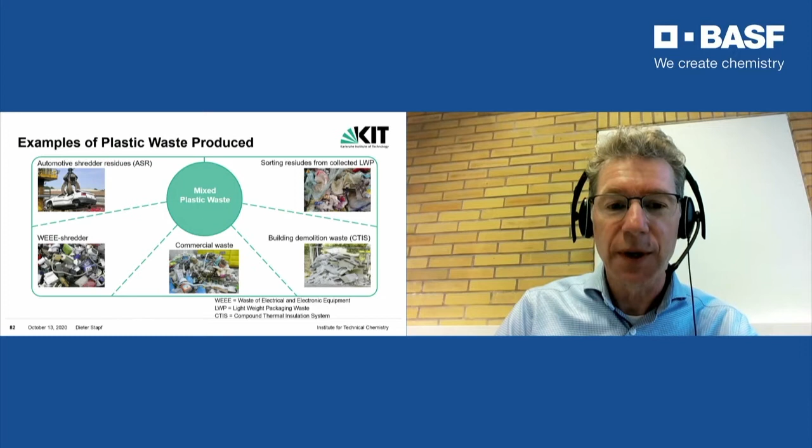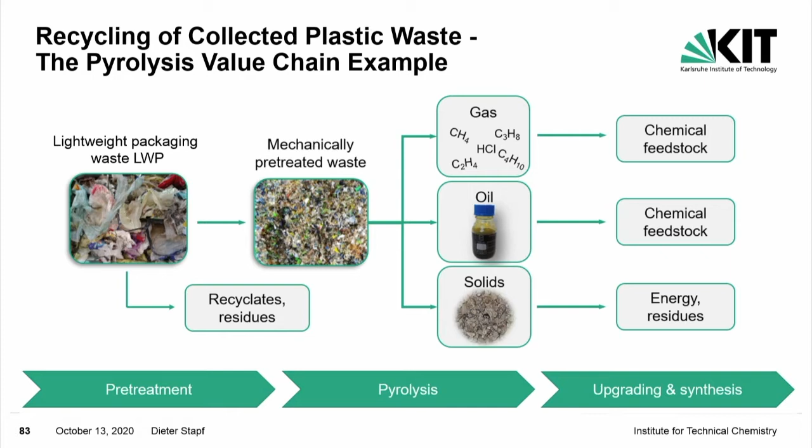So let's talk about the top right corner, and that's what we've seen frequently today, which is the lightweight packaging. So let's have the next chart. And we see here the entire chain, how it is being handled today in Germany. So we have the collection systems, the packaging waste, yellow bag. They are being sorted, and then we have the recyclates, and the lion's share goes into incineration. It can be mechanically pretreated and then go into chemical recycling. We have the example of pyrolysis. There's also gasification, but today we're talking about pyrolysis.

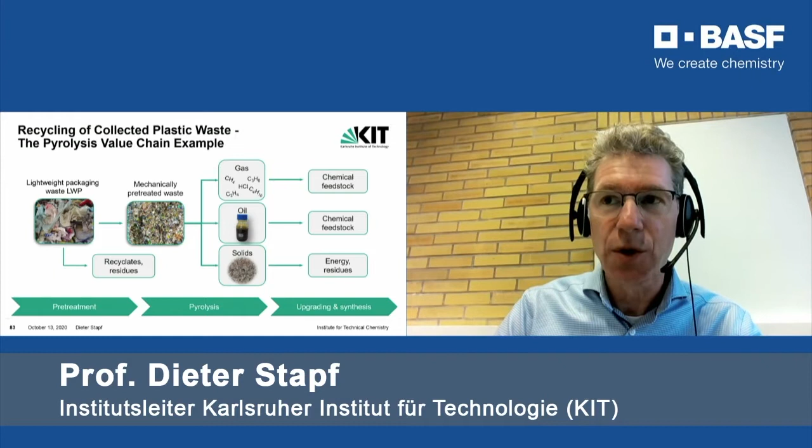There are always three products: one gas, which for plastics waste is very attractive, then the desired product, which is the pyrolysis oil, and a solids fraction, which has carbon, but also all the other inorganic chemicals which cannot be mechanically sorted and are being captured. And then we've seen the oil, which is the chemical feedstock on the right, and then we have the gases from pyrolysis, which can be used just equally well as chemical feedstock. It's not so much in terms of volume, but it can be well used. And the solids actually go into energetic recycling.

It's a smaller share, a smaller fraction, and we saw the products are being upgraded in order to be used as steam cracker feedstock, or naphtha. So chemical recycling as a large separator of materials. And often people ask, what's the energy need here? If you look at styrene, for example, and pyrolyze that, chemically, physically, you can calculate what the energy demand is, and we measured it for all kinds of waste that we took here, and you can see for all these fractions the respective energy demand for heating, melting, pyrolysis, and evaporation. That's the entire process of pyrolysis. And then this divided by the energy input of the waste.

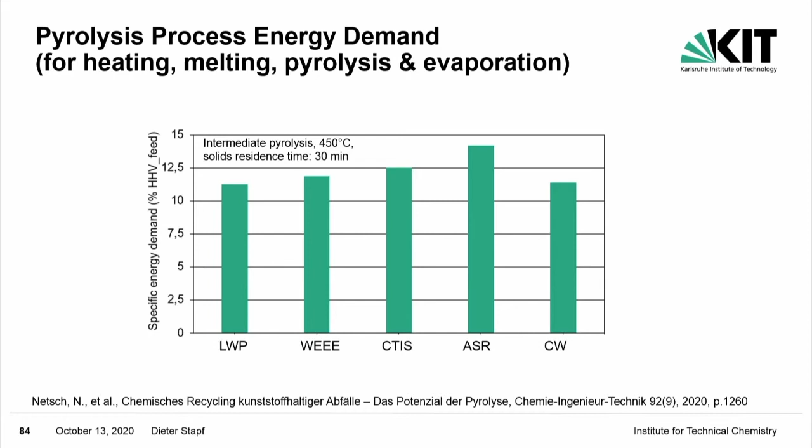So you see that we're always between 10 to 14% of the energy input, which means the other way around, 80 to 90% are afterwards in pyrolysis kept as energy, so they go into the feedstock that can be reused, and that's the research target. So that's 80 to 90%.

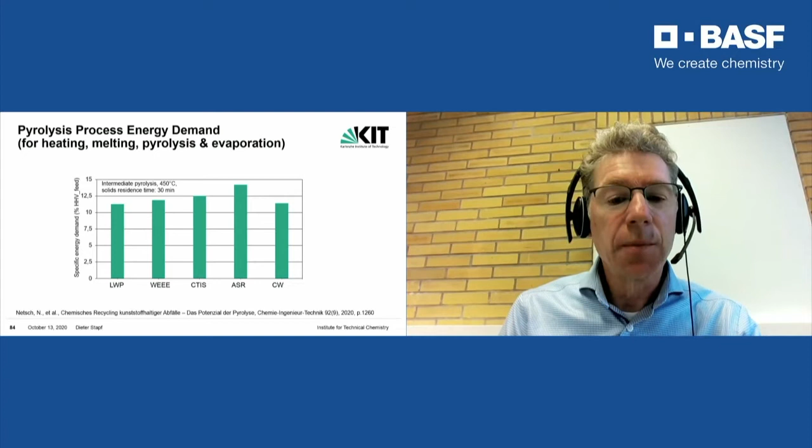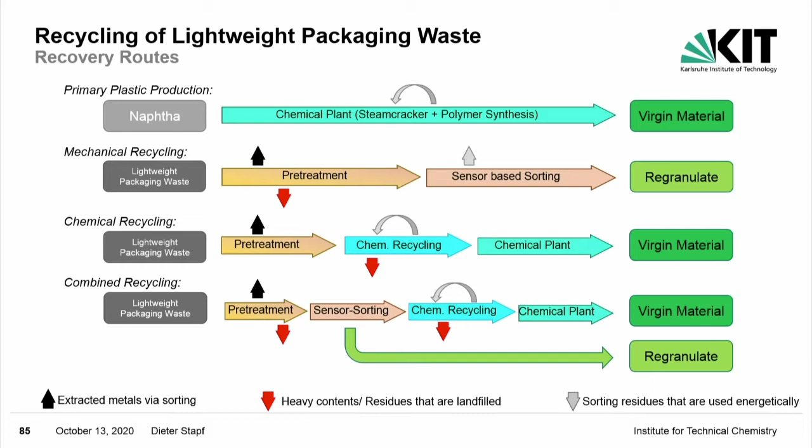So the next picture: I said that I will talk a little bit about a technical assessment in the life cycle analysis. In the first part of the conference, we've already seen that. So what we can see here is comparisons between mechanical, chemical recycling, and a combination of both, producing new materials from crude oil based materials, naphtha. So you can see naphtha, which is the standard process.

To make new plastics, we have mechanical recycling, for example, taking LWPs, then you have a pre-treatment, it's a pre-sorting process. There are these arrows: black means that you capture metals, and red means that mineral fractions are being captured. And then you have a sensor-based sorting plant with which you get the recyclate after a further treatment. Here it is a regranulate, which is what we called it. It's plastics which, in terms of quality, have a different kind of quality than the virgin material.

In the middle arrow, of course, instead of sorting, you could put everything into chemical recycling, but we don't want to do that. And this is why we have the last path at the bottom, and that's exactly what I showed you before, namely sensor-based sorting, which is easy to capture and has a reasonable quality, standard quality, which results into secondary plastics. For example, a food grade packaging, according to German law, a detergent packaging, and the rest ideally could be used for chemical recycling, and then that leads to new virgin material.

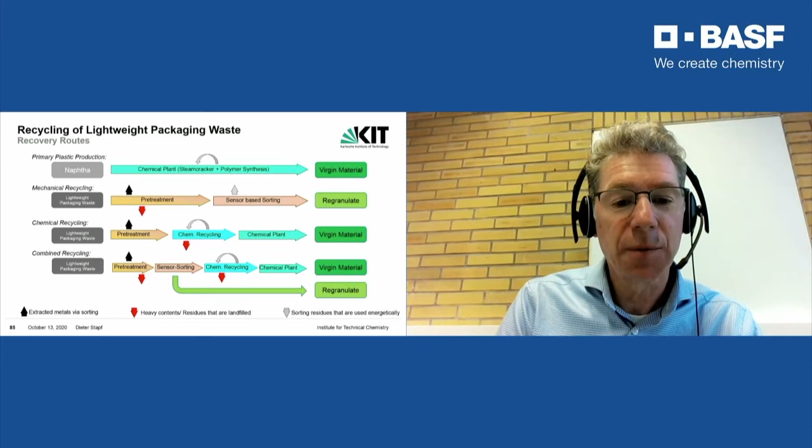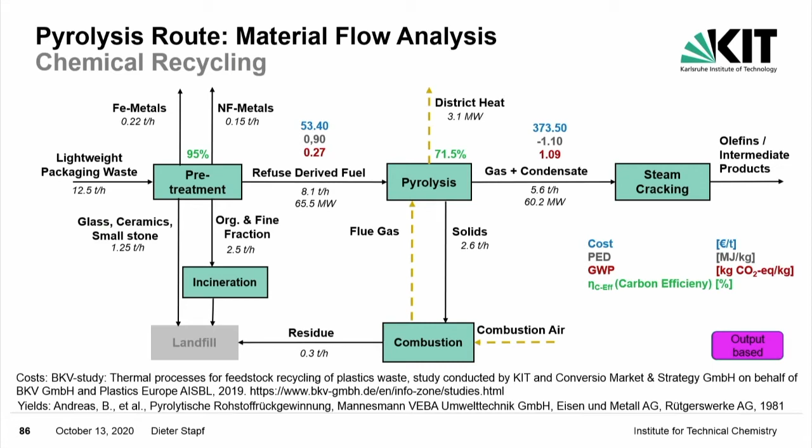And there are side processes which we implicitly also introduce into the entire treatment, but I only want to concentrate on the four larger ones on the right: cost, primary energy demand, global warming potential, and the recycling efficiency. And that's the most important parameters. And since we said we're not going to talk so much about cost, I'm leaving that out. Of course, you can also talk about the treatment cost for these processes. So what's important is the energy demand and CO2 potential and how much is being recycled at all.

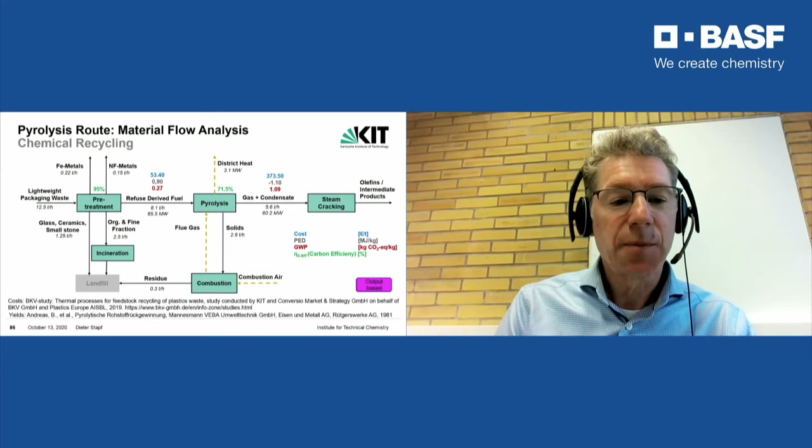And let's stay with this path on the next picture. It becomes a little clearer. So you can see mass flows through such a process for lightweight packagings, 12 tons per hour. That's a 100,000 ton annual sorting plant. That's modern state of the art.

And in the sorting plant, some aspects are excluded already. So you see at the bottom left all the minerals, some organic fractions. Also humidity is excluded. That's a pre-treatment step here. And then afterwards you get an RDF, and that's a refuse-derived fuel. And you see also the metal fractions and non-ferrous fractions, which are then separated from the entire flow.

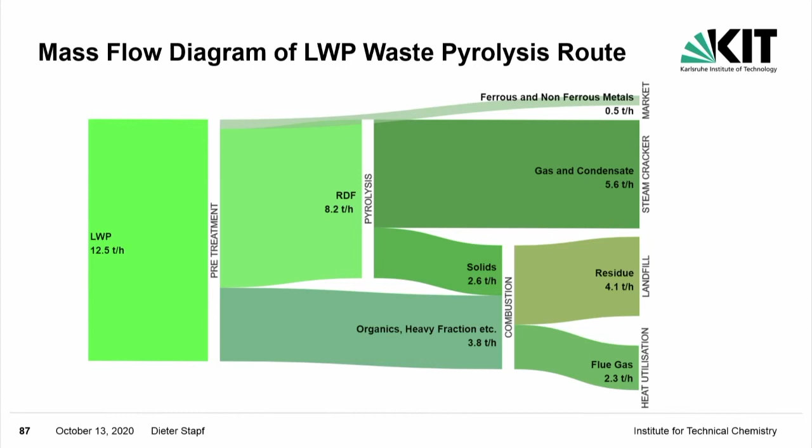And on the basis of this balance, I showed you that meanwhile you can also measure how these material balances for pyrolysis are for the different materials. We can then do some scaling, because plants in industrial scale do not yet exist, but you can extrapolate, of course. And the calculation that we used here led to a considerable part of energetic recycling, not the absolute optimum that I showed you before, but a realistic case study.

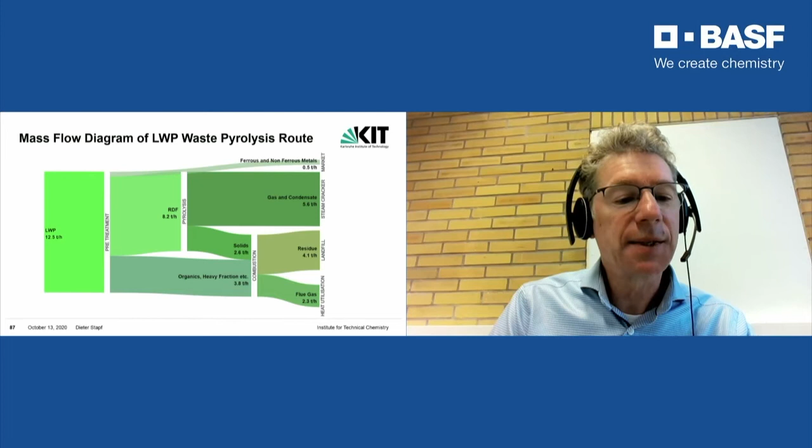And now I'm going to show you, I think it is the last chart already. This is an overview in the form of a table for different scenarios, and the scenarios correspond to what I showed you before in the pictures. So mechanical, chemical and combined recycling, a combination of mechanical and chemical recycling. And the values that I'm going to mention are always comparing to the virgin product on a crude oil basis.

And for mechanical recycling, we have two scenarios. One for 42% utilization, and theoretically there is the possibility that with modern sensor-based sorting plants such a high share of plastic granules can be sorted out, but with some possible quality issues. Today we see, and this is why it says 22% here, that approximately 20% of the plastics materials from the yellow sack or bag are then new granulate, and this is the figure that we used as a basis for our calculation.

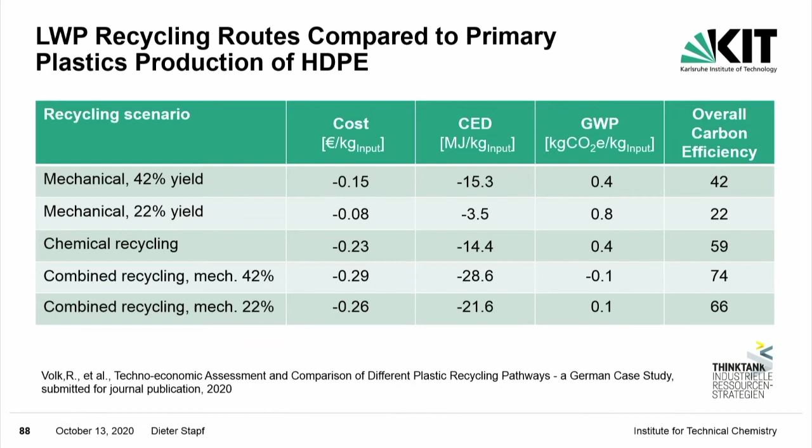So CED, that's the energy demand in megajoule per kilogram input, always compared to a plastic on a crude oil basis. So we took polyethylene here, but also other plastics were analyzed, and you can see that chemical recycling and also the mechanical recycling and the combination are advantageous compared to the crude oil-based product, as we've heard before. And you can also see that the combination of mechanical and chemical recycling, of course, shows the most positive energy result. With the global warming potential, the CO2 emissions, you also see that these options show low values, and that is always process specific in terms of the emissions.

You might remember, we've heard it before, if you have 1.8 kilograms of CO2 per kilogram of crude oil, and here it is much lower values in these recycling paths. And all these recycling paths expressed as a carbon mass landing in new plastic are shown on the right. That's the overall carbon efficiency, 42 or 22%, and chemical recycling is 60%. We already heard that for the two plants of Plastic Energy and Quantafuel, they had 75%, but they are not on the basis of these totally mixed wastes. As we have observed here, if you combine mechanical and chemical recycling, then you can achieve very high recycling rates.

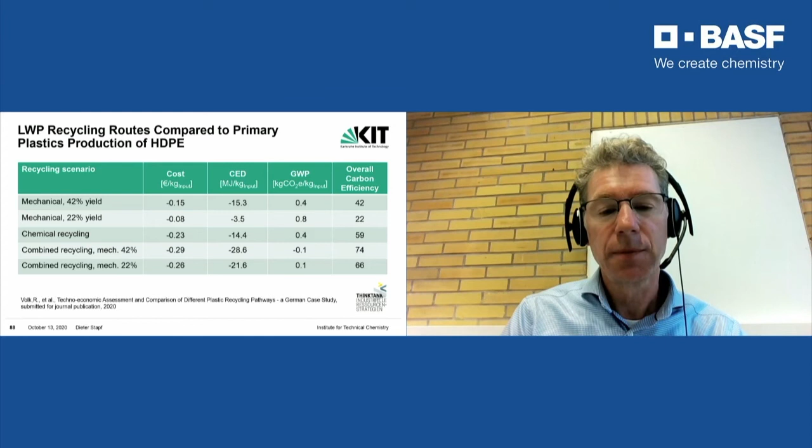And I now have summarized everything briefly of these studies, or the work that was at the basis of this study, and that's my last chart. So here you can see a brief overview on the technical assessment of combined mechanical and chemical recycling, a study conducted by the Industrielle Ressourcenstrategie think tank. They were active at KIT, and here categories: energy, CO2 emissions, costs. I could comment on this as well, but I will leave it. Maybe there is a question referring to this.

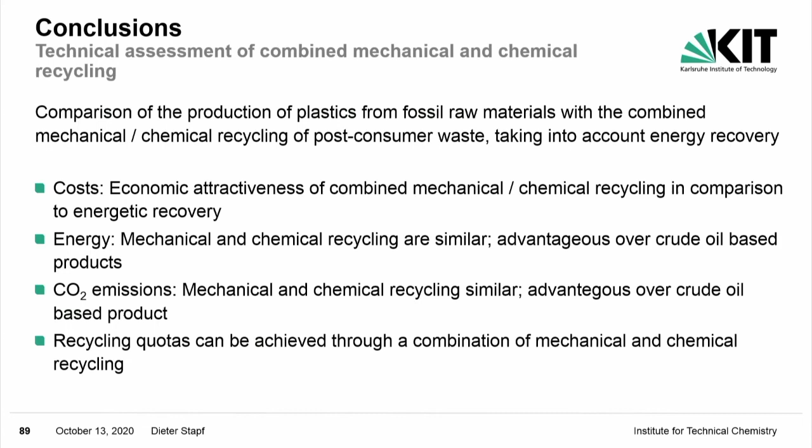Energy demand: mechanical and chemical recycling have a low energy demand, mechanical even lower, and plastics on this basis, of course, are more advantageous than production based on crude oil. CO2 emissions: here the same applies. Saving CO2 emissions by mechanical and chemical recycling, enormous opportunities here. If we look at recycling quotas, recycled carbon mass,

if we consider what Germany wants to reach, 63.5% recycling quota for packaging materials, it can be a combination of mechanical and chemical recycling to reach this goal, in theory, if we don't have any design for recycling products. And of course, we could continue here for other composite materials, which are not packaging material, where you can almost sort nothing. This would be possible by way of chemical recycling. But we only looked at this on the basis of pyrolysis. Of course, there are other chemical recycling processes for specific types of plastics.